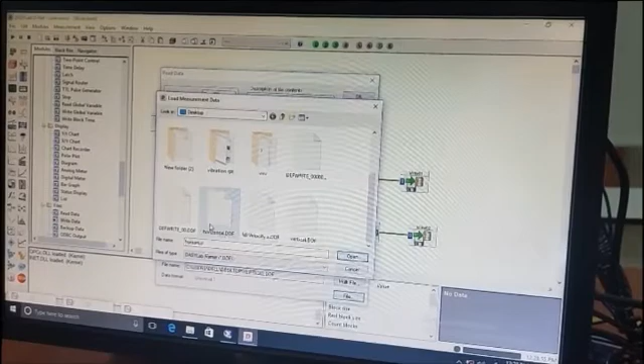So from this experiment, we managed to get the acceleration of the vibration of a fan. The acceleration of the vibration of the fan consists of two components, horizontal and vertical. From the result, we found that the horizontal component has a higher acceleration than the vertical component. The horizontal component has an amplitude of 0.13, while the vertical component has an amplitude of 0.07.

We could get a velocity time graph by integrating the acceleration time graph. From the result, we also find that the horizontal component has a higher amplitude than the vertical component. The horizontal component has a root mean square velocity of 0.045, while the vertical component has a root mean square velocity of 0.023.